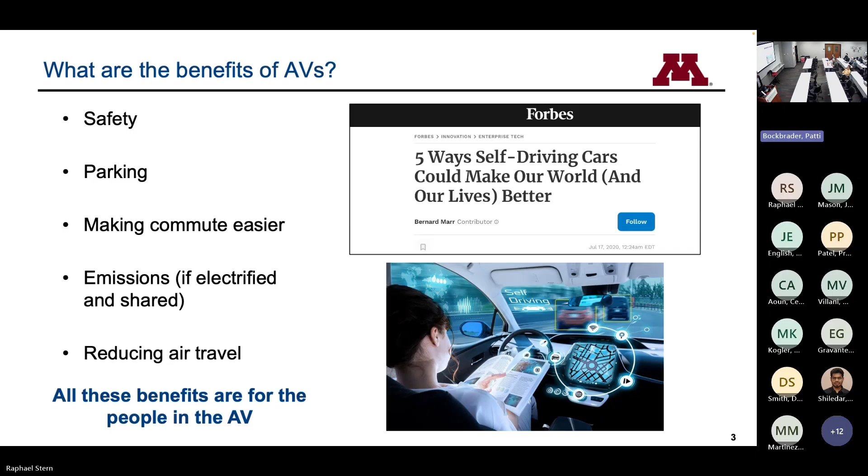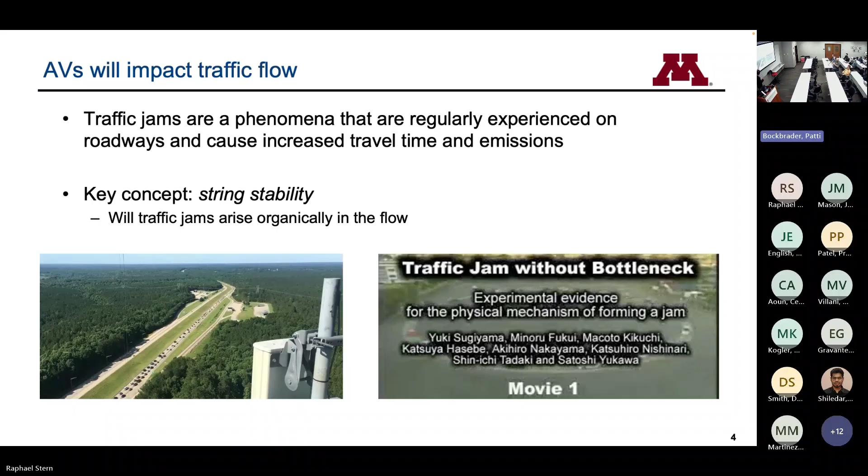One of the things I find absolutely fascinating is traffic jams. I love traffic jams. Many of you hate being in them, but I really think they're fascinating. Many of you may have seen this before, but it's worth highlighting. Over here on the left, we have a traffic jam in the wild, on a roadway. You see here, in just a couple seconds, vehicles up there start to slow down, and then it propagates backwards up the stream of traffic.

For a long time there was a debate in the traffic engineering community about what was happening here. Is this due to external bottlenecks? Maybe a curve in the road, maybe there's glare causing drivers to brake? It was actually physicists in Japan who said, well, let's do what physicists like to do—let's run an experiment and test this out.

So they created this scenario: pure car following, one vehicle driving behind the other. They got rid of all the messy externalities of the world—no police officer pulling people over, nothing on the outside of the road. They're really just looking at pure car following. They start in an initial uniform flow, all vehicles at the same speed, the same spacing, and relatively quickly a traffic jam emerges. We traffic engineers call these 'phantom' traffic jams, because they arise for no apparently good reason.

What's actually going on has to do with how individual vehicles interact with each other, resulting in what we call string unstable traffic. The theory behind this was largely developed in the 1960s, 70s, 80s, even 90s. The basic idea: imagine a string of vehicles, one following the other, all at an equilibrium flow—same speed, same spacing, no acceleration.

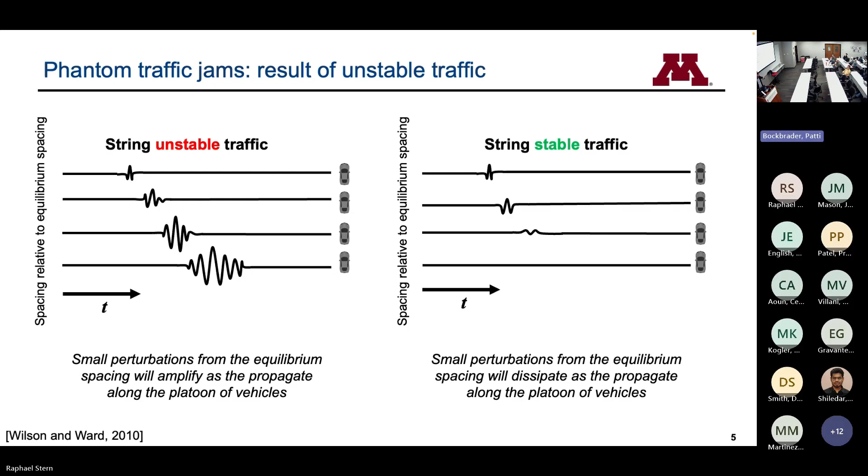One very popular approach is things like platooning, interconnected systems where vehicles use something like DSRC or other communication to communicate with each other, tell each other what they're doing. The cool thing is this has been around for quite a while, as you can tell from the vintage of those vehicles. This was done in the early 90s.

I was still a toddler when this video was filmed. This is a bunch of Buick LeSabres in the early 1990s, driving at an incredibly tight inter-vehicle space headway.

You can basically have vehicles drive very safely at much closer headways, much smaller spacings, meaning that you can potentially increase the capacity of a single lane of traffic somewhere 2 to 3x. That's huge, right? If you took a 2-lane or a 3-lane highway in one direction, you reduce it down to a 1-lane road

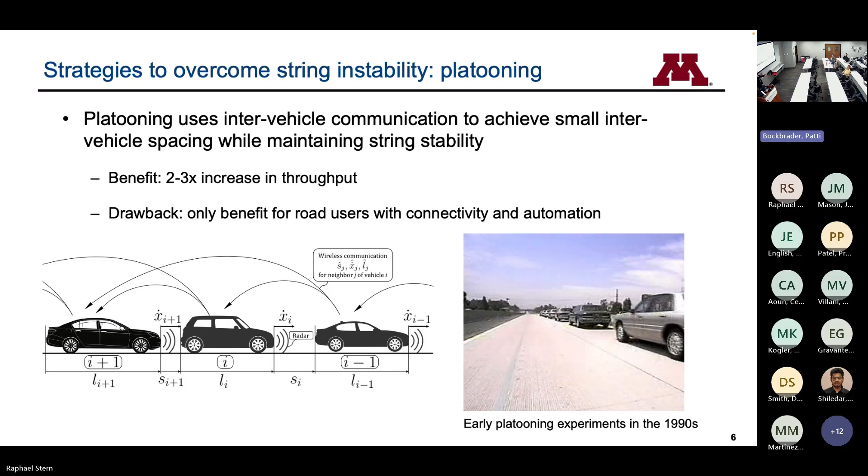without actually doing anything in terms of changing the infrastructure, or you take your 1-lane road, right, and you get the capacity of a 3-lane road, and all you've done is changed the way the vehicles drive. You're moving 3 times as many people on the same road.

The challenge with this, though, is that platooning requires everyone to opt in. You can't just do this if one or a small number of vehicles on the road want to do this. Everyone has to have the technology, everyone's technology has to work, and you all have to agree on some standard platooning protocol to make this work.

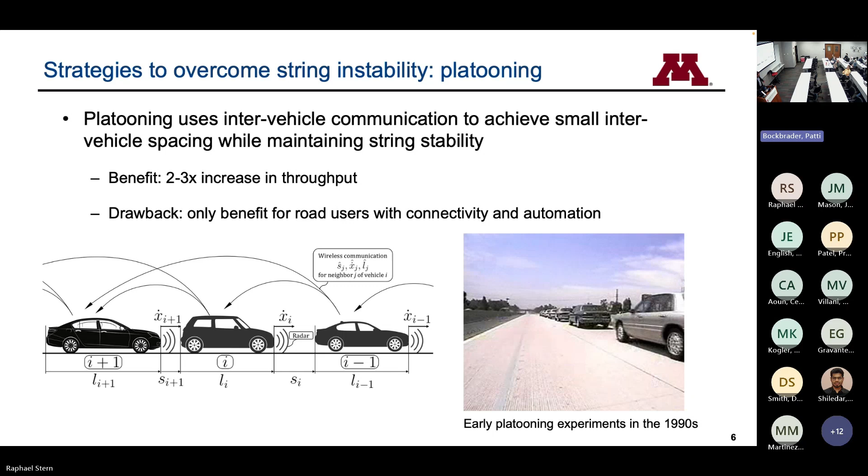Now, to be clear, we've long known there are many ways to increase the number of people we get on the same lane of highway. If you're a traffic engineer, instead of platooning, you can imagine carpooling. Just bring a friend along, and you've now doubled the capacity of that road.

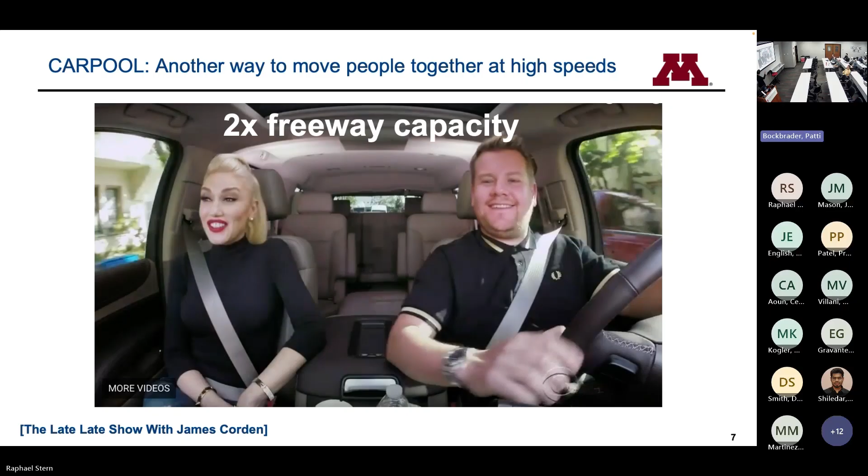If you're a fan of James Corden and his former show, you might know where this comes from. You pick up some more friends, now you have 4 times the capacity. So increasing capacity in terms of number of people per lane mile is not actually that difficult.

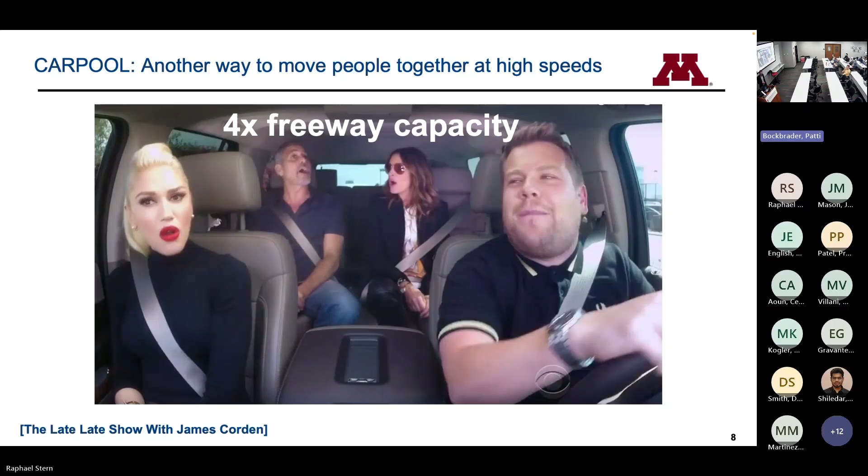We just don't seem to want to do it. If you're an urban planner, you might have seen this before. This was famously demonstrated by the city of Munster in Germany in the early 1990s, where they showed how many people can we get on one of our city blocks, depending on their mode of transportation. Obviously, if everyone drives cars, the road is...

Now, I hear a lot of, yeah, but congestion is not a problem, I'm not concerned about congestion, soon we're going to have autonomous vehicles. The problem with that statement is just by swapping them out for autonomous, I don't really see a difference, right? They still take up the same amount of road space.

So just swapping them out for autonomous, and we've already talked about all the implications that autonomy might have on your travel behavior, there simply isn't enough road space. If we're running out of road space now, just upgrading to autonomy isn't going to do it.

So that's what I want to focus on for the next couple of minutes: how are autonomous vehicles likely to drive? How is that going to impact the traffic flow and the corresponding capacity? And how can we improve that, or how can we deal with that as traffic engineers?

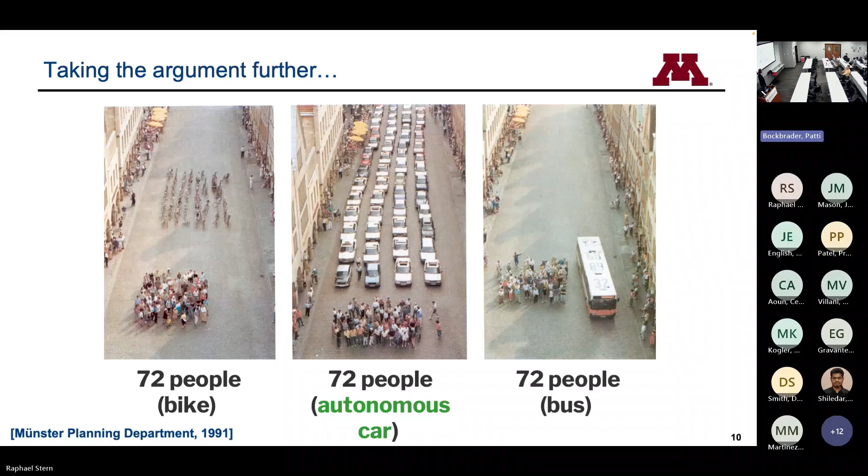Now, I think this crowd, I probably don't need to say this, but by saying autonomous cars, there's a whole bunch of different levels of autonomy, and different types of features, different driving capabilities come with different levels of autonomy.

So we range from no autonomy, level 0, that's what I personally still drive, to low levels of autonomy, level 1, level 2, driver assistance, where you're handing over some driving tasks to the vehicle at some stages, all the way up to high and full autonomy, where most or all driving tasks, most or all of the time, are done by the vehicle and not the human. So when we talk about autonomy, I want to make this distinction between low-level and high-level autonomy.

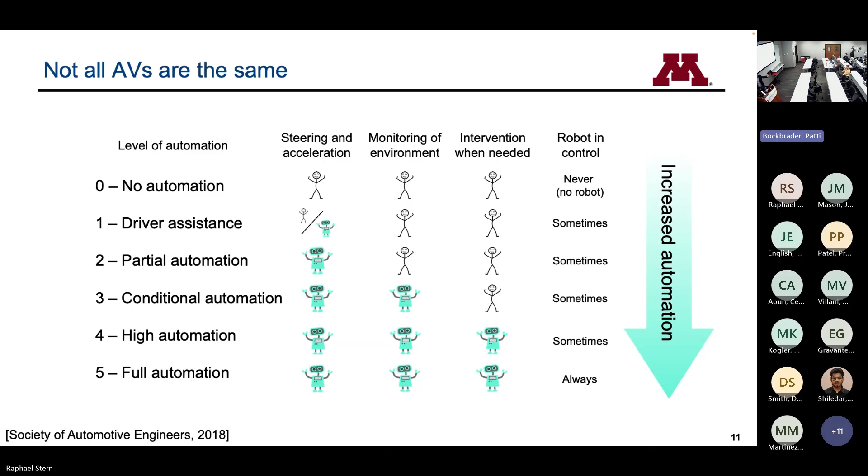Now we'll start with low-level, because that's what we already have. If we look at driver assistance features, level 1, level 2, things like adaptive cruise control, I'm at the point where when I rent a car from Enterprise or Hertz, most of the time it has this feature. Until recently, it was a premium feature on a luxury car, something a traffic engineer would pay extra for. But we're now at the point where that's simply not the case.

So my question is, how do low levels of autonomy, level 1, level 2, behave when it comes to string stability? Remember, string stability tells us whether we're going to see phantom jams arise for no good reason, or whether the system has more of a jam-smoothing property that gets rid of those jams.

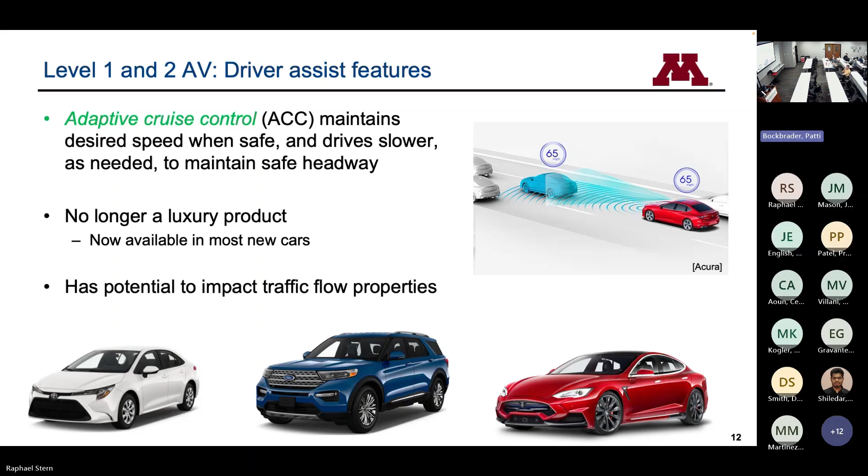Now, you can look to the literature, decades of research dating back to the early 90s, saying these things are actually relatively straightforward to design in a string stable fashion. Platoons of ACC vehicles may be unstable, but individual ACC vehicles likely can be designed quite easily to be string stable. You can see some sort of speed disturbance from subsequent vehicles that generally tend to dampen. So the literature says ACC vehicles are string stable.

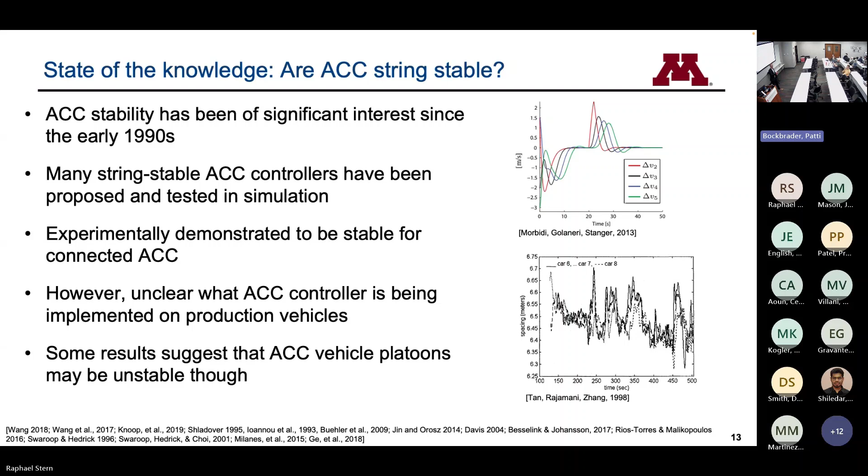The problem was, when I started this, it was inspired by renting a couple of vehicles and noticing that they weren't always behaving exactly how I'd expect if they were actually string stable. So the way I wanted to address this is by getting data for how they behave, building a model for their behavior, and then analyzing that model to understand what their behavior actually looks like.

The model I want to use here is a common traffic-level model. The reason is, you could invest a whole lot of effort into a very high-resolution vehicle dynamic model at the vehicle level, which is valuable depending on what you want to do. But if you want to look at traffic-level effects, entire corridor traffic-level effects, I actually want a slightly lower resolution model.

So I want to sweep all of the nonlinearity that happens with your engine, through your transmission, all the way down to tire pressure and road surface friction, into a relatively simple model that captures, at a particle level, the acceleration and braking of a particle.

The models that are pretty common here in traffic engineering are called car-following or microscopic models. They're ordinary differential equations that describe the acceleration of a vehicle as a function of the spacing available to it in front, the relative speed with the vehicle in front—is it catching up to or falling behind that vehicle—and the speed of the vehicle.

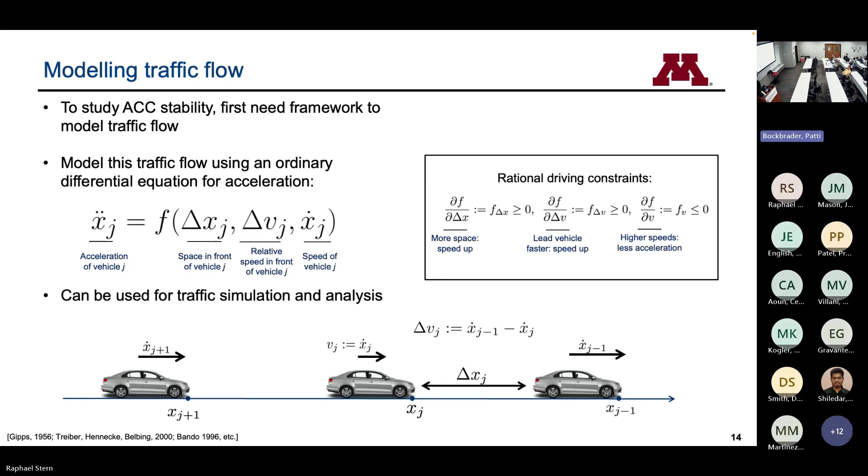All right, so it turns out that if you use these models and want to ask the question of string stability in car-following models, that's actually pretty straightforward. You can inject a perturbation and watch what those perturbation dynamics look like.

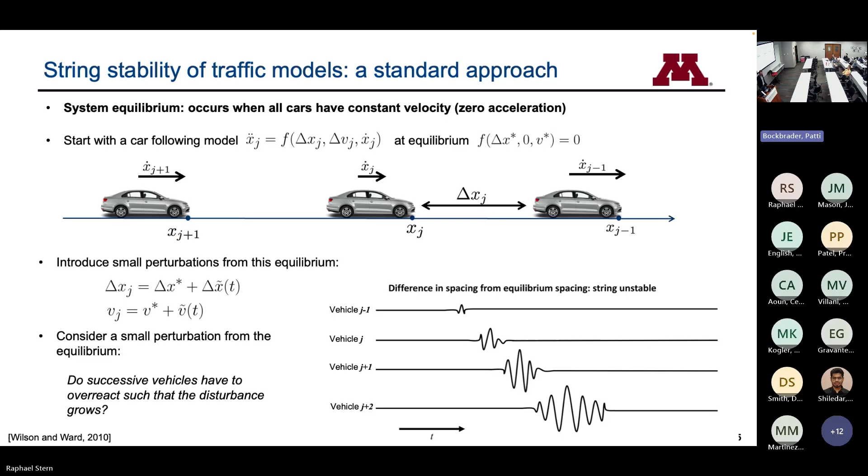And if you're willing to accept linearization—looking at the equilibrium and the neighborhood of that equilibrium, though we could debate for hours what's a fair neighborhood—if you look at linearization around equilibrium flow, remember equilibrium flow means same speed, same spacing, then you come up with a relatively nice characterization having to do with the Bode plot and which perturbation frequencies are amplified, to determine whether or not a car-following model is string stable.

It turns out it only depends on the partial derivatives of the car following model itself with respect to the state variable, and so you get this lambda 2 value. If that lambda 2 value is less than 0, we have a string stable model, meaning we're generally going to be dissipating or dampening waves.

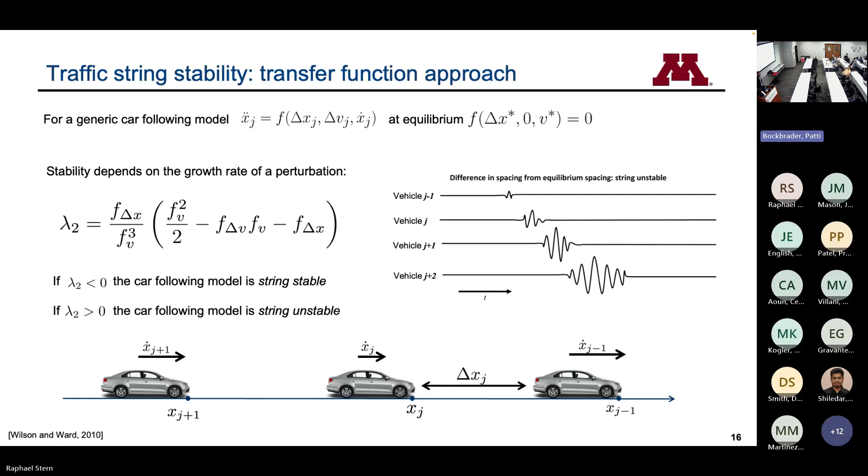And if lambda 2 is greater than 0, you're going to be amplifying perturbations or waves. What's really nice about this is all we have to do is come up with a calibrated car following model that closely matches the actual vehicle behavior at the vehicle level. Then, assuming we can take partial derivatives of that, we can analyze it and determine whether or not it's string stable. So the next step is to collect data and understand what's going on.

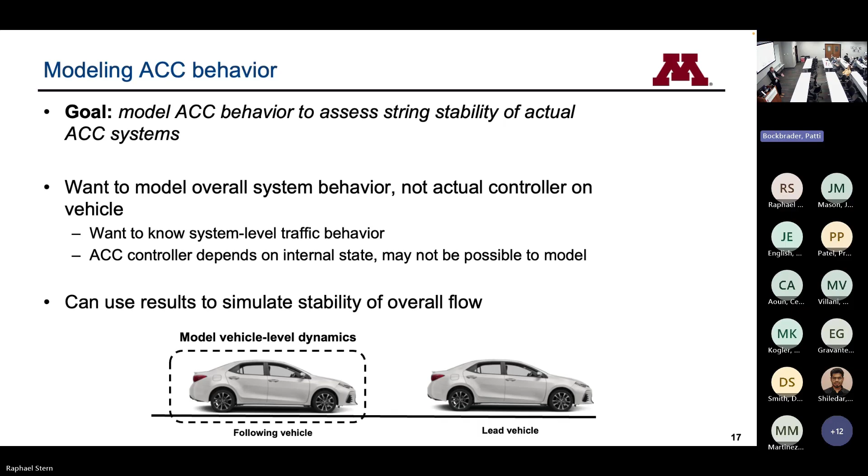The goal is to come up with a car following model that describes the following behavior of the vehicle. I'm sweeping a whole ton of nonlinearity under the rug here because I'm just looking at this as a particle, a vehicle that travels along the road, and I want to be able to match the acceleration.

The model I'm going to use is an optimal velocity type model coupled with a relative velocity component. Optimal velocity is somewhat of a misnomer — I prefer the word preferred velocity. Optimal velocity makes it sound like this is the optimal velocity to drive at based on some sort of optimization routine. That is not true. Really, these are constant time gap models.

So if you learned the 2 to 3 second rule in driver's ed, follow 2 to 3 seconds behind the vehicle in front of you — that's exactly what this is. The faster you're going, the larger you want that gap to be. And if you look at the literature, which dates back 20 or 30 years on string stability, that's exactly what they say to do.

So there's reason to believe the car manufacturers won't necessarily tell you exactly what they do. In fact, I've spoken with some and they say they don't really remember — from translating the original model, the original controller, down into the vehicle, there were so many modifications to make it work that they can't write down a closed form solution. But my guess is it's something pretty close to this.

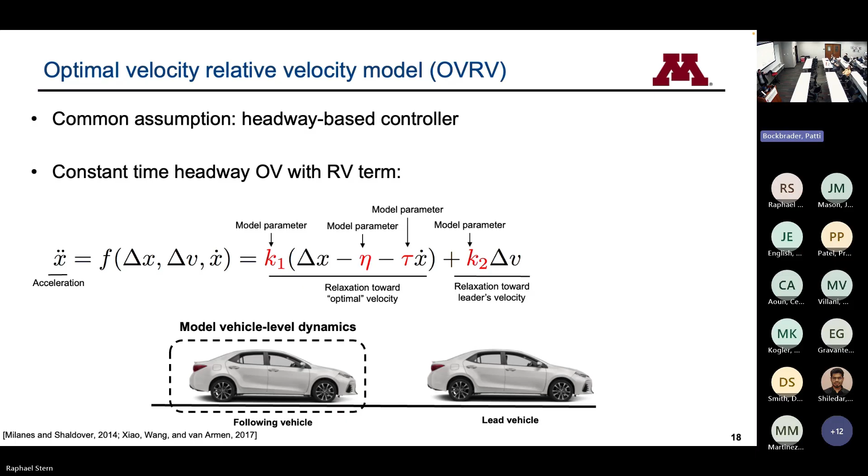So then you've got to go out and collect data. The way we do this is we get 2 vehicles. The lead vehicle drives with some predetermined speed, speeding up and slowing down. The following vehicle drives with adaptive cruise control on and just follows the vehicle in front of it. Both vehicles have high accuracy GPS receivers, so we get a good sense of the speed of each vehicle and the spacing between them, which we can use to get the relative speed.

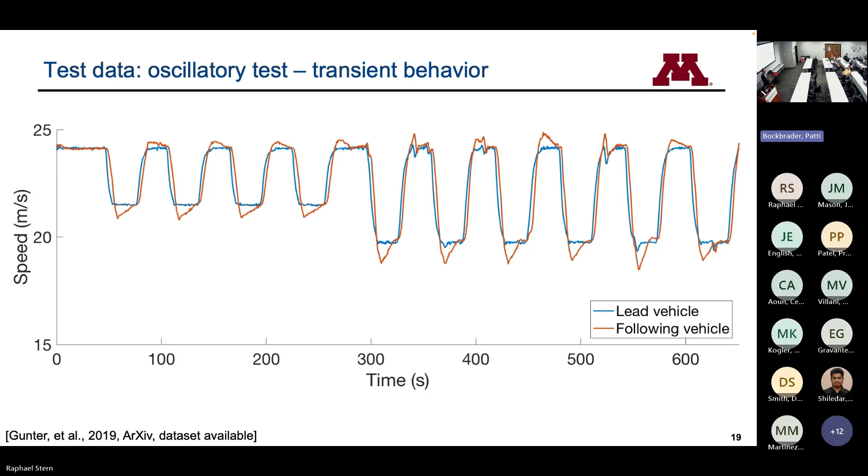Just to give you a sense of what some of this data looks like: we start driving, we slow down, we speed up, etc., and then we watch what the following vehicle does. Remember, this following vehicle is just driving with adaptive cruise control.

Another experiment involves some sharper braking events, and again the following vehicle shows a little bit of lag. These systems are working on relatively cheap sensors, generally radar-based in the vehicles we were testing, so there's a bit of a lag, which often means they have to brake a little bit harder.

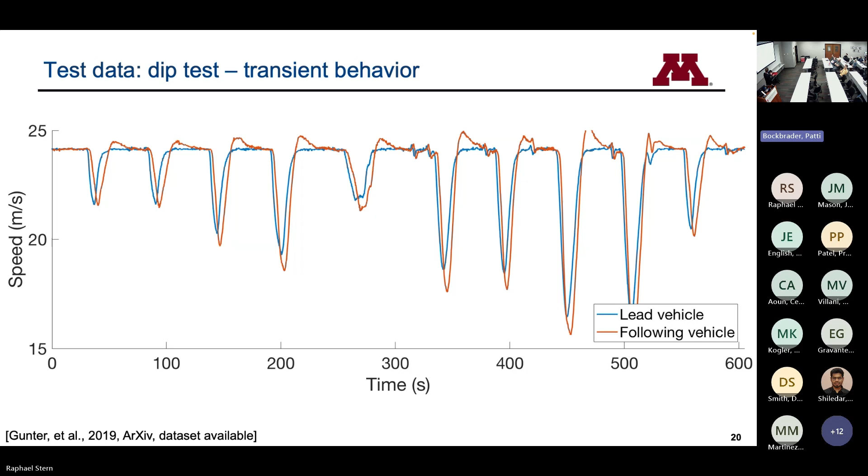And that's going to lead us to our conclusions about their string stability. Now, first of all, I think a reasonable question here is: we've taken an incredibly complex nonlinear vehicle dynamics and swept it into a really simple linear car following model. Is that a valid or reasonable solution?

So what does that tell me? That tells me that my modeling assumption that we're dealing with some sort of car-following model, where the controller is probably some sort of PID-like, proportional-like controller on a constant time gap, is probably not that terrible of an assumption. And this model is probably reasonable.

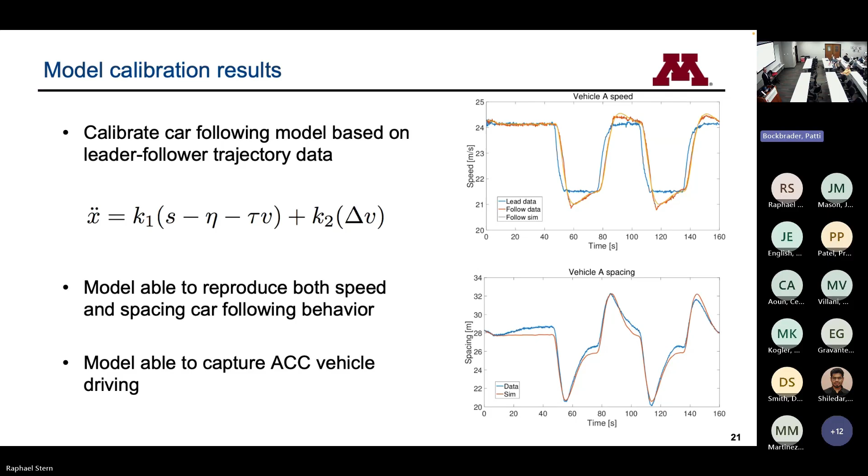So I did this not just on one vehicle, I did this on a whole bunch of vehicles. Initially 7 different vehicles, and I've done it on a couple others since. For each of these vehicles we can collect the data and use that to calibrate this model. Once we have this model, we can look at the partial derivatives. This is a linear model, so partial derivatives are really easy to take. We have the values for all the parameters, so we can easily compute whether or not this is string stable. The result is that all of the vehicles we saw are string unstable.

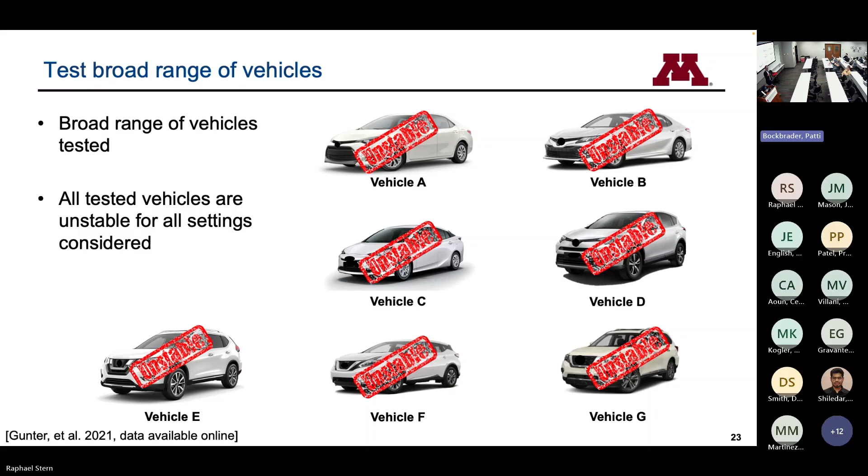Now there's an interesting second story here, and it really depends. You'll notice that all of the vehicles I originally tested are internal combustion engine vehicles, and there's a whole bunch of lag, delay, and nonlinearity that comes up. So it wouldn't surprise me if, even if you're looking at control theory from the 90s that says this is how you design string stable controllers, actuating the car like that is actually not that straightforward. Because all of a sudden you have not just a differential equation, but a delayed differential equation, which is much uglier to deal with.

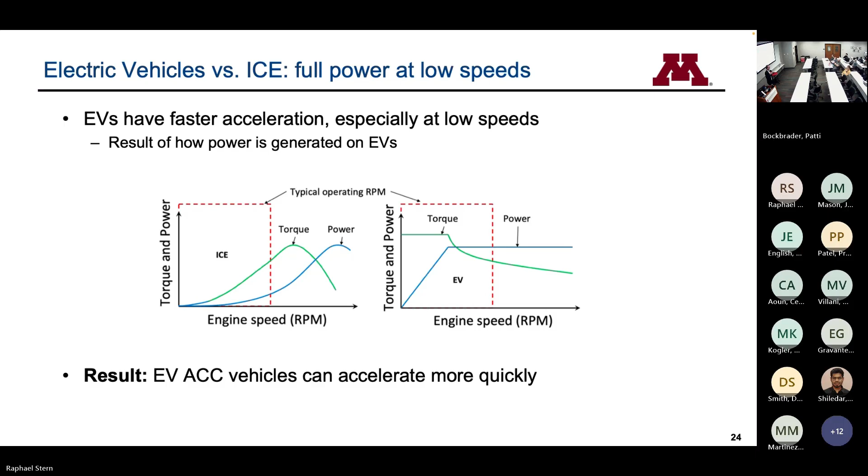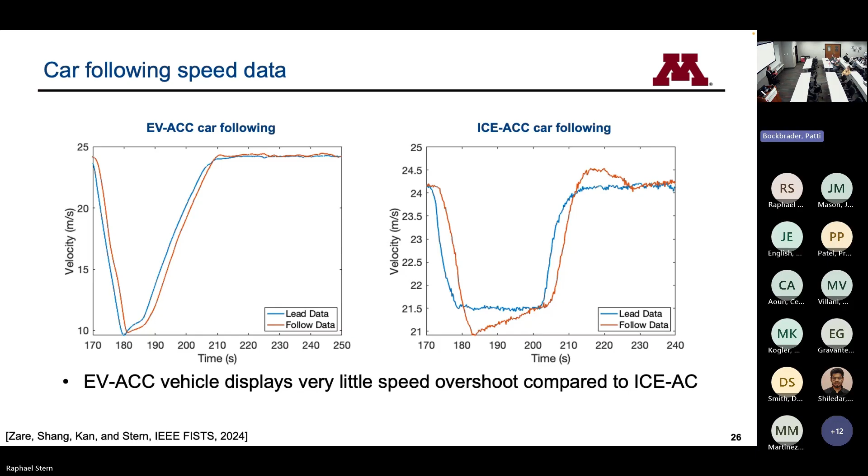Okay, we looked at this a little bit. It turns out when you stare at this for long enough, you start to notice how well the model fits the data. It turns out that simple symmetric model, which assumes the same braking and acceleration profile, works relatively well for internal combustion engines, even though braking is a mechanical process whereas acceleration is a much more complicated process. But for these electric vehicles, that model simply didn't work.

So when you look at the spacing versus acceleration space, in blue is the data. And that model I showed you, the constant time gap, proportional control type model, is symmetric—it assumes the same acceleration and braking behavior. But if you look at the data, that's not close to true. You can brake much faster than you can accelerate, even on an electric vehicle.

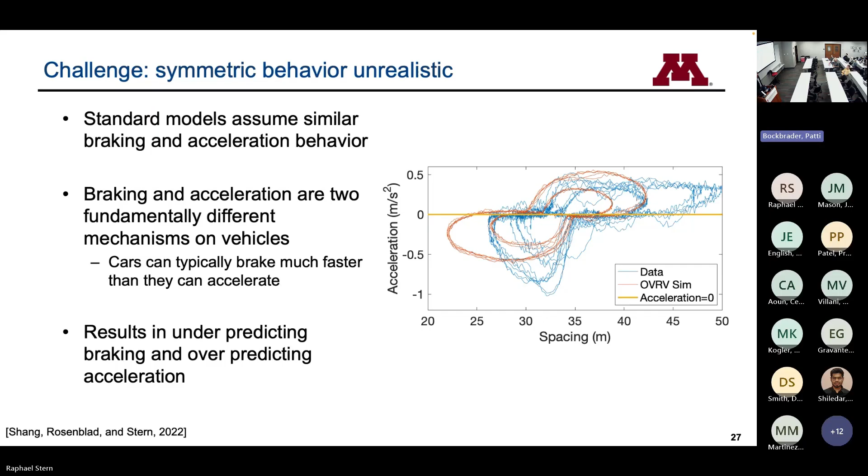So we spent quite a bit of time building more complicated models that capture this behavior better. That's really because when you want to do things like watch how these waves evolve, you need relatively good models of the individuals. So we introduced a couple different models. Here's one that worked particularly well. Yes, you're introducing more parameter values, but obviously it's going to be better, right?

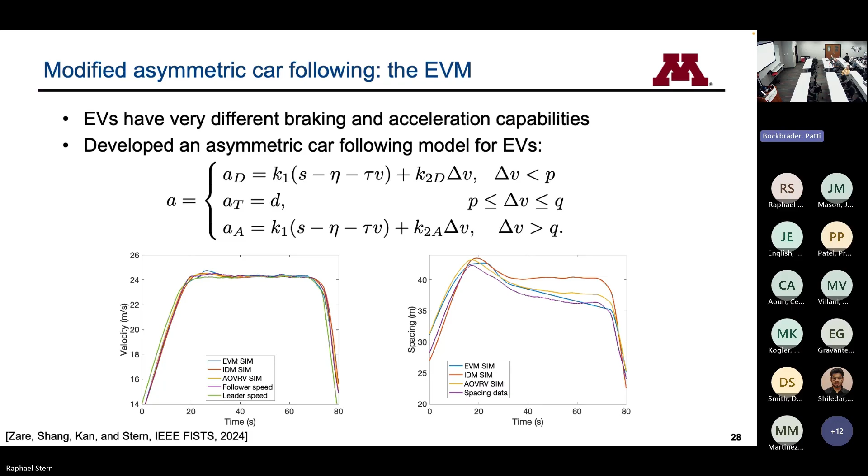You can break that down into an acceleration, braking, and coasting phase, and get a much better model. The punchline is, if you look at simulations of platoons of these EV ACC vehicles, you see much less overshoot, almost wave dampening on braking events, and much less overshoot on acceleration events.

This suggests that low-level automated electric vehicles are about as close to string stable as you might expect, which is kind of exciting. So we started with human drivers, string unstable, traffic jams emerging out of nowhere, like in a merge scenario.

We then said maybe there's hope in automation. Looking at the literature, low levels of automation ought to be string stable, which might ease some congestion. But when you look at the data, no — the AVs we have today are still string unstable. Though the ones we're starting to get, the EV ACC vehicles or EV AVs, might be promising.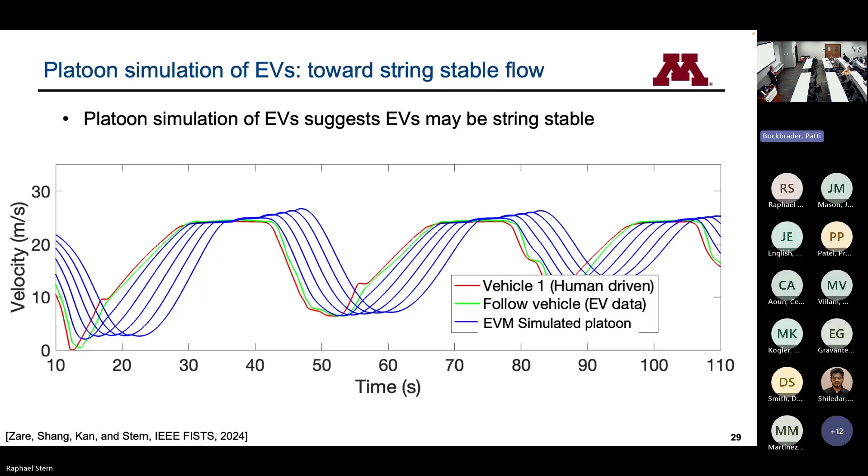If you're a traffic engineer, you've got intersections, merges, highways, and corridors that you need to manage. What does all of this mean for capacity? So we've looked at a bunch of different simulations with different levels of automation — commercial ACC vehicles, as well as a theoretical look to the literature on what people think autonomous vehicles ought to behave like in terms of reaction time. We can look at what the capacity is on something like a merge bottleneck in simulation.

Before we do that, I need to take a small detour. It's particularly cool to do this at OSU because this is all work done by an engineering professor here in the 1930s. Some of you may be familiar with this, but since we're a vehicle and automotive center here, I'm not certain — so if you've seen this, you can tune out for a few seconds, but I want to make sure we're all on the same page understanding these results.

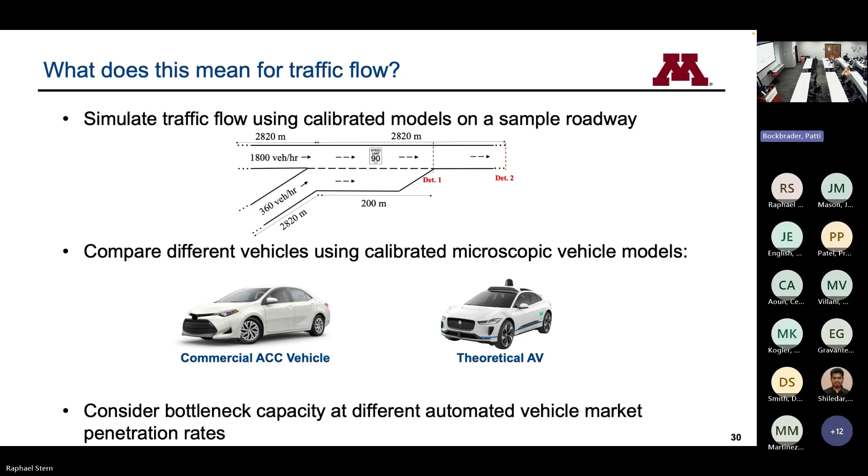On the left-hand side is Professor Bruce Greenshields, a professor here in the 1930s, who had the idea that traffic speed probably depends on traffic density. However, in the 1930s there simply weren't that many cars. So when he went out to collect data, he observed a lot of vehicles at very low densities — vehicles per mile of road — and correspondingly high speeds, and then one data point at a high density and low speed.

What he did is what any good engineer would do: fitted a linear regression to it and got a line. That gives us the Greenshields relationship — a linearly decreasing relationship between speed, from some maximum speed at no density (when there are no vehicles, traffic flows at the maximum speed, maybe the speed limit or a bit above), down to when all the vehicles are on the roadway and it becomes a parking lot, where traffic flows at no speed.

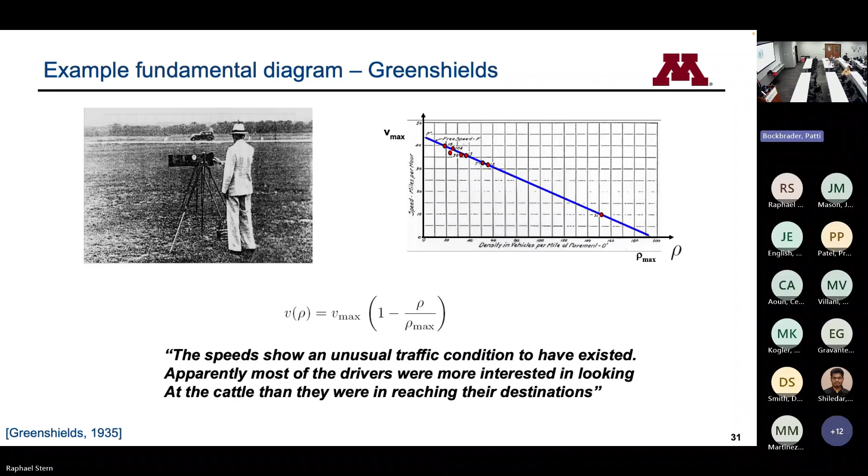If you know this, and you know fundamental properties of flow from fluid mechanics — that flow, vehicles per hour, equals average speed (miles per hour) times average density (vehicles per mile) — you can get a flow-density relationship. If you assume that constant linearly decreasing speed-density relationship, you come up with this parabolic flow-density relationship. There's a couple of important quantities here: we've got a critical density.

That's the density where we go from free flow to congestion. At that critical density, we see our maximum sustained hourly flow rate, or capacity. Those two numbers are crucial for highway management, because depending on what they are, that determines how many vehicles per hour you can get across your pavement, and at what density things start to become problematic.

Now, if you look at the data, it turns out Greenshields was close but not quite right. In reality, it's more like a triangular fundamental diagram. Vehicles in free flow generally don't really interact with each other, so they're all going at the same speed regardless of density, up until some critical density. In fact, if you look at actual data, which we'll look at in a minute, you'll see this is typically a lopsided triangle.

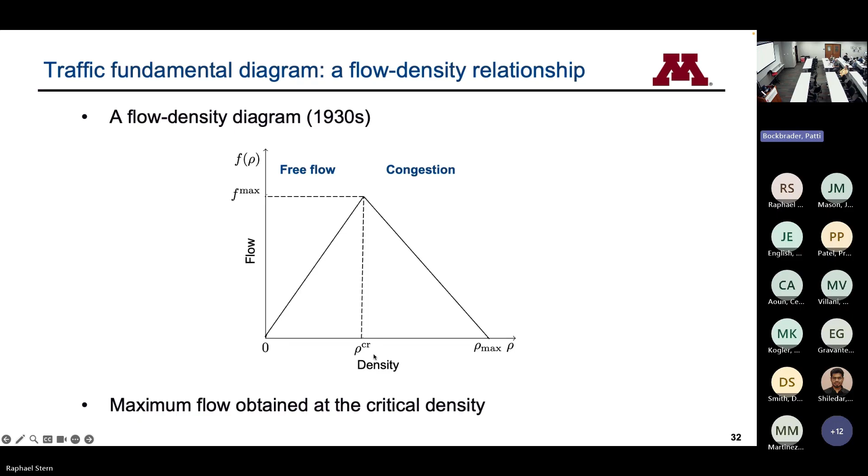So it's not an isosceles triangle like this, but it's some sort of lopsided triangle, where the critical density is typically a quarter or so of the maximum.

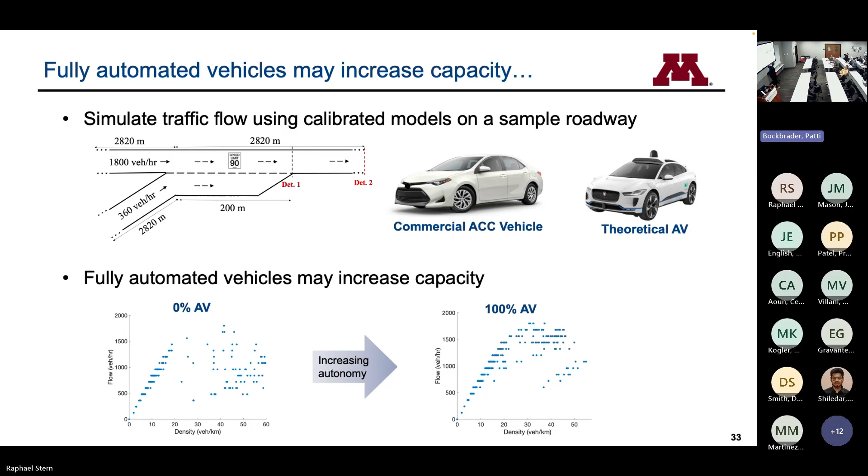All right, back to what we want to do now that we understand the fundamental diagram. If we look in simulation at fully automated vehicles, not considering connectivity—remember connectivity gave us like 2 to 3x—not considering connectivity, we see maybe a 20% increase in capacity.

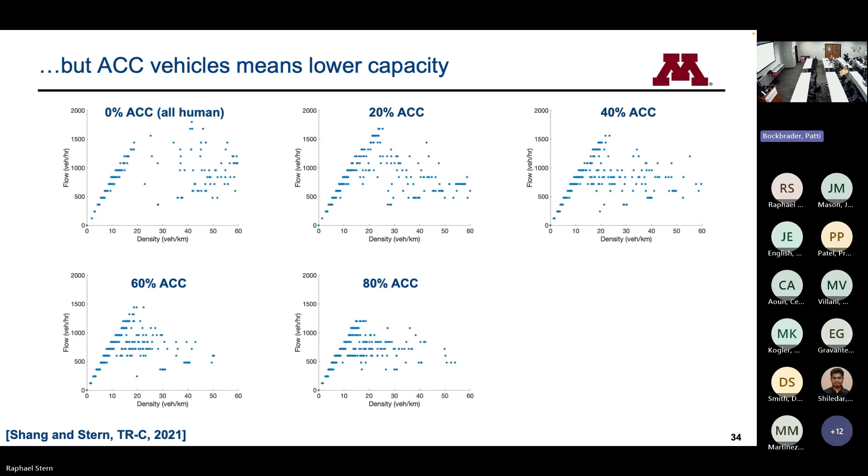But if we look at vehicle automation as we have it today, lower levels of automation, ACC, specifically ICE ACC, internal combustion engine ACC, at 20, 40, 60, 80, and 100% ACC vehicles, what we see is that the fundamental diagram collapses. Remember, the two important quantities here were our maximum sustained flow and the density at which the transition from free flow to congestion occurs.

What you see here is the more ACC vehicles we have, turns out they're much more conservative, much more lead-footed—they hit the brakes harder. They're safe, they're comfortable, and I don't blame car companies at all. But they are not designed or implemented in a way that is friendly to a traffic engineer with traffic flow considerations in mind. So you might see a 30% or so reduction in capacity. That means your 3-lane highway just became a 2-lane highway, and all that happened was a bunch of people turned on ACC. If you're a traffic engineer, that is potentially problematic.

All right, so at this point, the vehicles we have, likely the autonomous vehicles we have, will likely not actually bring us to that promised place of congestion-free traffic.

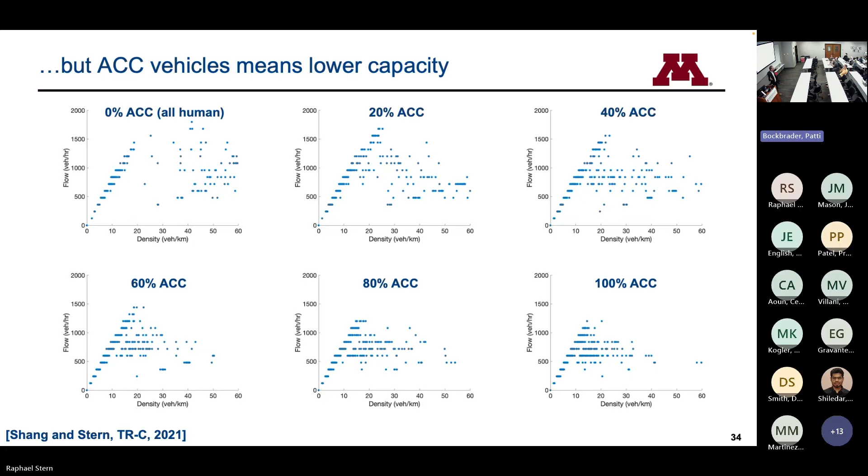However, I want to talk a little bit about what it might take to get there, and what it might take to actually drive the vehicles we have slightly differently—not necessarily with the objective of just looking at the occupant of the vehicle. Obviously we still want to make sure the car is comfortable and safe to drive in, but also add in the additional piece of information of what the overall traffic flow is like, and how we can improve conditions on the overall traffic flow.

And so to do this, I want to start with a model of a human driver. Honestly, it's a very similar model, just slightly more complicated. Instead of a constant time gap, it's a variable time gap that depends on distance. I want to start with a human driver model because ideally autonomous vehicles ought to drive similar to human drivers, or as similar as possible, but a little better.

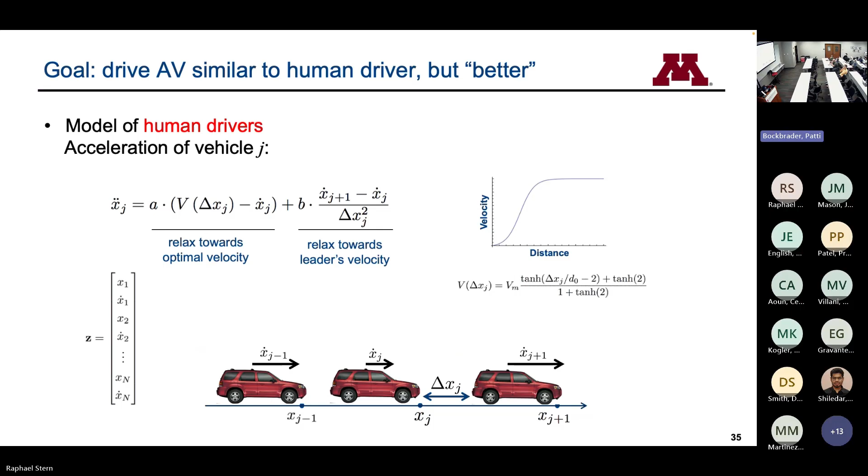And what's that 'a little better'? Well, the easiest thing you could think of is probably something like: you have some ideal speed you want to drive, you know what the local density is, so you have some optimal speed you want to drive based on that, and you do some sort of feedback control to push you towards that.

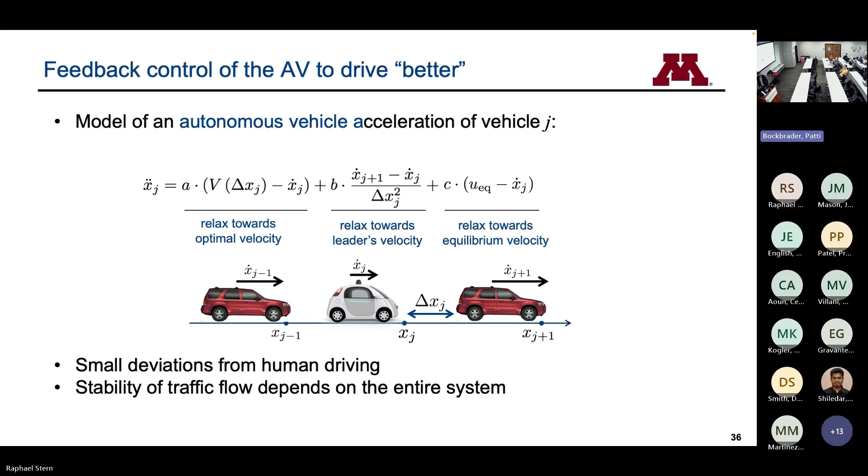Pretty straightforward—you can look at that same ring road setup. Your state is now the speed and spacing of all the vehicles on that ring road, and you can set up your linear system. If you do pole placement, if you increase your gain high enough, you can get all your poles on the left-hand side of the plane. The system is controllable—not a surprising result.

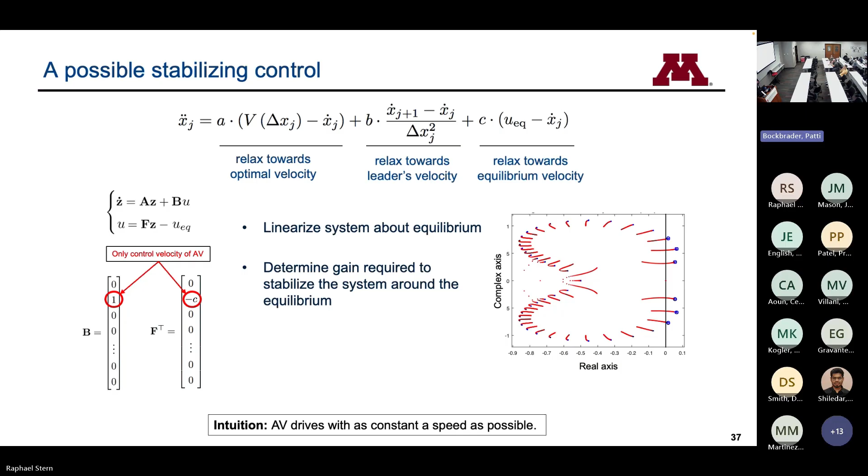But in theory, if you get the vehicle to drive with—what does that really mean? The intuition here is: increase your gain, which is basically just saying forget about speeding up or slowing down because of the vehicle in front of you, and just drive at a constant speed. If you pick that speed correctly—and again, we can have a long discussion about what it means to pick that speed correctly—you can already make a lot of progress.

All right, so unfortunately, that type of controller is very difficult to implement on a self-driving car. So we work to do something very similar. I'm not going to go into all the details here, because I think what's really important is the intuition: drive at a constant speed, at the right constant speed, unless local safety constraints tell you to do otherwise—unless you're going to get too close to the car in front of you.

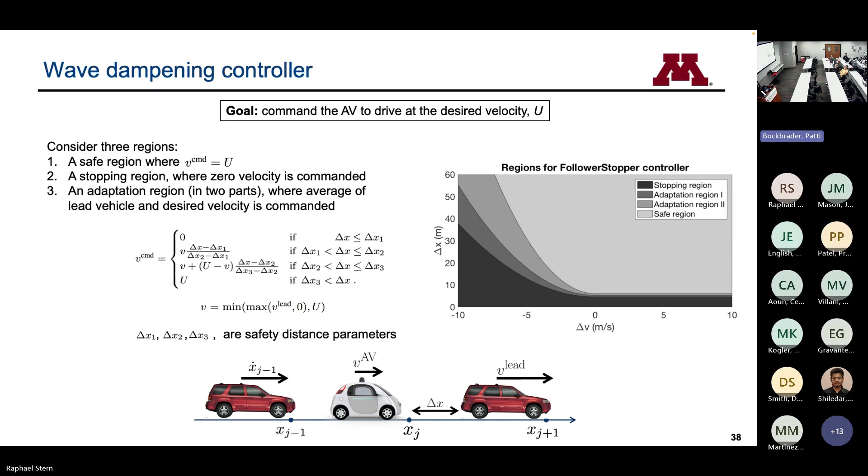We tested this as part of work I did a couple of years ago as part of a funded study with collaborators at the University of Arizona who had a self-driving car. I want to show you the video that resulted from this.

We're starting with that same ring road setup. The vehicle with the arrow on top is an autonomous capable vehicle. We have 21 cars on the road, all being human driven at this point, but we can hit a button to implement that controller on that vehicle. At the bottom, these are the speeds of the vehicles, and you can see relatively quickly that a stop and go wave started.

At this point we've turned on the autonomous controller, and what that vehicle is doing is exactly the intuition of that controller: drive at the right constant speed unless local conditions tell you otherwise. What's nice is it does open up a gap, but then uses that gap as a buffer when it hits the back of the wave, sending backwards a smoother signal for the vehicles behind it to follow.

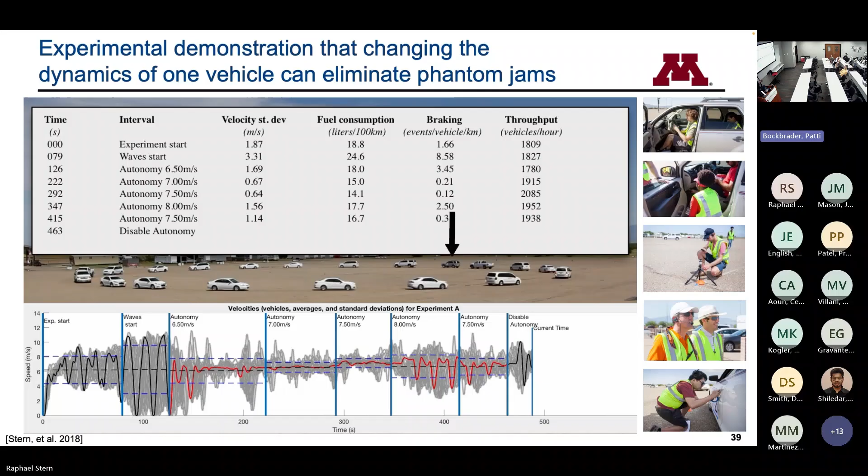By the time you get 20 cars up the line, sure, each driver adds a little oscillation, but it's not quite enough. So about 1 in 21, roughly 5% of traffic driving differently, is potentially enough to bully in a good way the other 19 or 20 drivers to drive better.

The cool thing is the other drivers had absolutely no idea there was an autonomous vehicle there. We hired people and said we're going to pay you to show up at this parking lot in Arizona at like 6 in the morning because it's July in Arizona, that's very early. We'll pay you for 2 hours to drive in a circle. They had no idea what was going on.

The only people in the know were those right in front of and right behind the AV, just in case something crazy happened. We wanted to make sure those were trusted drivers who knew what was going on.

You can look at the space-time diagram. Traffic engineers love to look at these. We have time on the horizontal axis, position along the road on the vertical. Each line is the trajectory of a vehicle. The more horizontal, the slower it's going; the more vertical, the faster. The red vehicle is our autonomous one. Comparing over here when we have traffic waves to over here when we're actively dampening those waves with just that single autonomous vehicle, you can see much smoother traffic.

We also had OBD2 scanners on each vehicle, giving us not super high fidelity measurements, but a relatively good sense of fuel consumption and onboard vehicle characteristics. We decreased total braking events, not surprising since we got rid of stop and go waves with fewer people braking. What was surprising to me was a nearly 40% reduction in fuel, not just for the AV, but across the board.

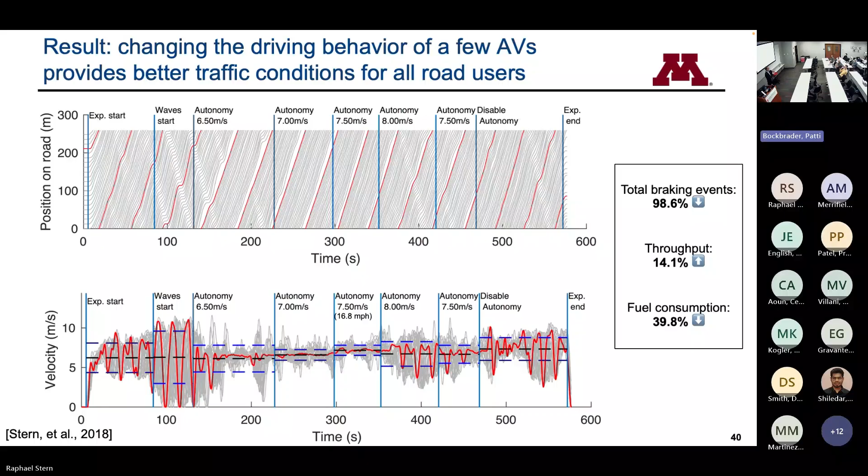Up until now, the way we've done traffic flow management, if you look at most traffic flow management textbooks, you assume a fundamental diagram based on the last 20 years of data. But it turns out that who's there determines what that fundamental diagram looks like. And if that's what you're building your control on, you want to make sure that you get that fundamental diagram.

So my vision for the future is to fight congestion with the AVs you have, not the AVs you want. In the short term, we might have worse or less effective AVs, or less efficient AVs from a throughput perspective. And that's okay. But what we need to know is who's there and how they're behaving, so that we can get a good estimate of what that fundamental diagram looks like and then update our control, or our control set points really, for that fundamental diagram.

I don't want to reinvent the wheel. We spent billions of dollars investing in our nation's traffic control infrastructure. If I tell you all of that is garbage, we need to completely tear it out and do something new, that would fall flat. That would never happen, right? Instead, I want to use data to make it a little smarter and a little more responsive to who's there.

So there's sort of a couple different parts here that are necessary. First, we need to identify who's driving on the road and figure out, is it an AV, is it an ACC vehicle, is it a human driver? Then we need to figure out what that mix of traffic behaves like when you look at the fundamental diagram. And then we can update our control.

What I'm going to be talking about here today is ramp metering control, perimeter control, where you're controlling the inflow into the ramp or into the highway. But in principle, you can apply this to any number of traffic control.

All right, very briefly, identifying who's there. This is something that I'm going to just very briefly talk about today, just because I want to get to something else. But the basic idea is we have cameras everywhere.

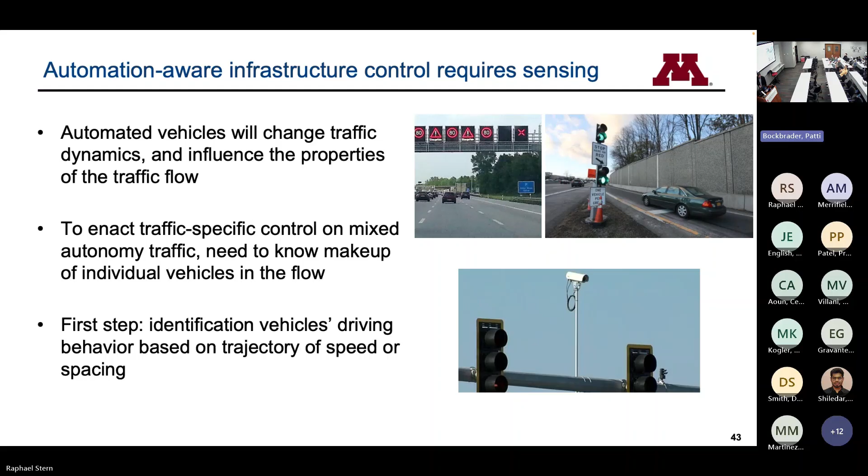And the way an AV drives, it accelerates. It's the same stimulus, same car braking in front of it. It behaves differently from a human driver. And so what we've done is we've done a couple of different, relatively naive neural network type approaches where you look at, you build an LSTM or something to predict, is that an AV, or is that driving like an ACC vehicle, or is that driving like a human driver? Turns out that is actually relatively straightforward.

Human drivers have much more variability in their behavior, and so you can even identify, is this a Toyota Camry or is this a Nissan Rogue? Because they have different ways of reacting to the same speed up and slow down.

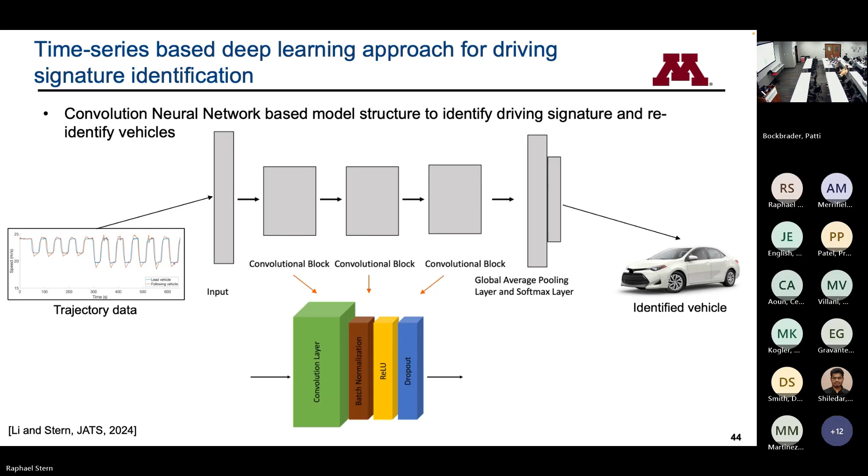All right, so let's pretend that we have this and it works perfectly. We know what each vehicle is. The next thing is we need to model those aggregate flow dynamics. The way we're going to do this is we're going to basically go back to the car following models and assume that we can calibrate relatively accurate car following models for each vehicle.

That's how we started the talk. And then kind of take those to the limit and look at them in the continuum to look at what that behavior is at the max.

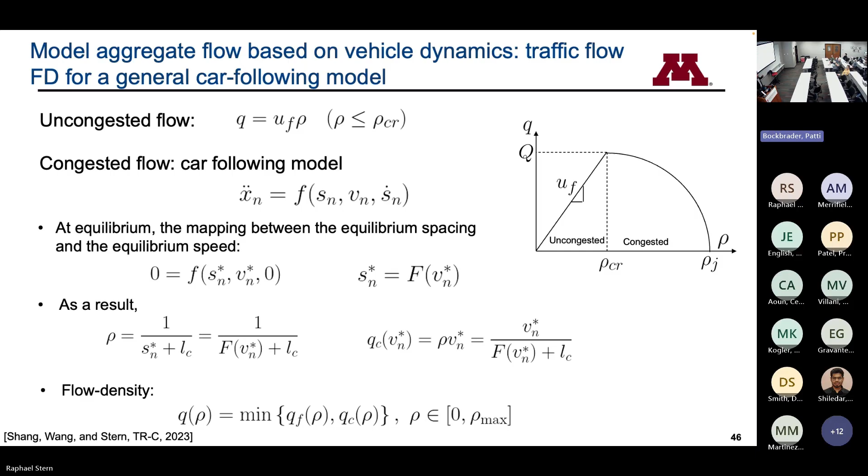All right, so at equilibrium, remember that equilibrium flow is we have no acceleration. We've got some sort of speed spacing relationship. And so what we can do is use that to come up with a density based on the speed, and then use that density, because the density is just 1 over the spacing, and then use that density and the property that we talked about before, where our flow is our average speed times our density, to come up with a flow density in congestion. In free flow, what we're going to assume is that all the vehicles just drive at the speed.

All right, and then we can do the same thing for the automated vehicles. And basically what we need to do is, the automated vehicles again are going to have our uncongested flow and our congested flow. And I'm skipping a couple of steps here, but basically, if we have that fundamental diagram for the automated vehicles, what we now need is a composite that's based on sort of the average, how many automated vehicles and human drivers do we have.

So we've got some parameter gamma, which tells us the percentage of vehicles that are automated, and we use that to compute a weighted average spacing, then a weighted average density. This gives us a density that's not just a function of speed, but also of the percentage of vehicles that are automated. That gives us a flow-density relationship, a fundamental diagram, where previously you only had density, but now we're looking at mean density and the percentage of vehicles that are automated.

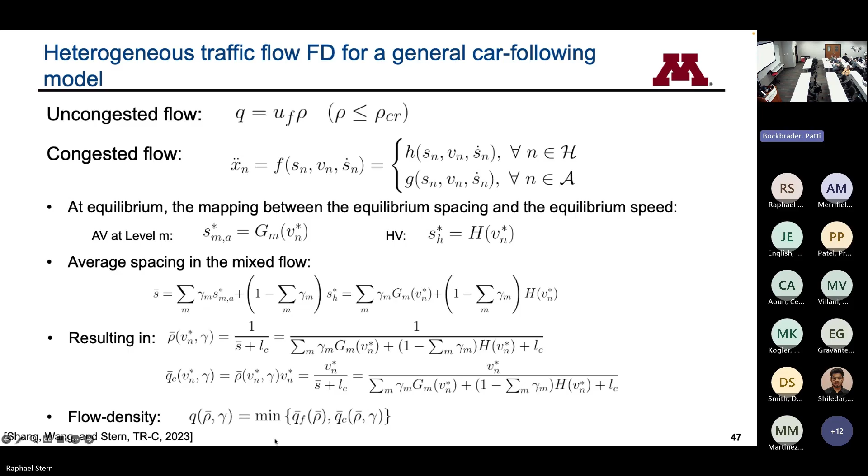So we get something that looks like this. If we assume human drivers follow an IDM, pretty common, and automated vehicles follow an OVRV, then in free flow everyone's driving together at the speed limit, but in congestion what matters is the percentage of vehicles that drive with the IDM versus the percentage that drive with the automated model.

So instead of the typical two-dimensional fundamental diagram, we've added a third dimension, the market penetration rate, the percentage of vehicles that are automated. At any particular market penetration rate, we can take a slice, and that's our current fundamental diagram, the simulation plots I showed.

In this case, I picked a pretty extreme example, a very aggressive or very conservative vehicle that greatly reduces the capacity, just to make a point. But in reality, depending on what species, or multiple species, of traffic you have, you could come up with different fundamental diagrams.

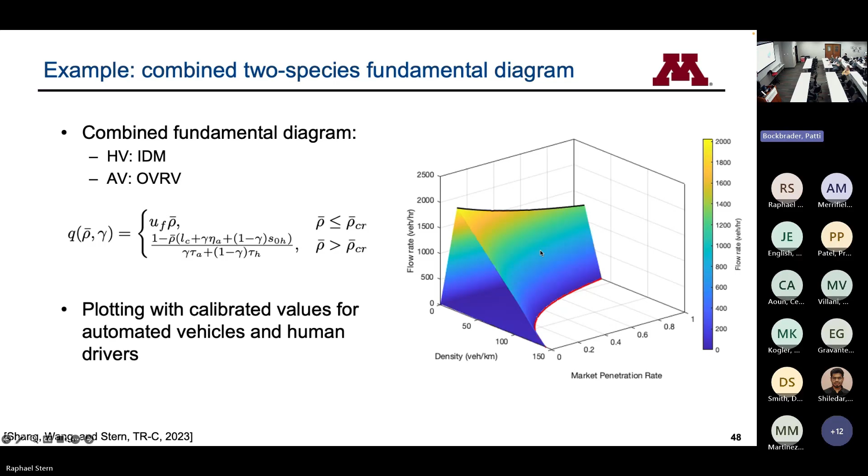So the last part is how do we use this to impact the control of traffic, specifically ramp metering control. The key to ramp metering control is really just that you don't want to get into congestion. The goal is to use the stoplight at the on-ramp to prevent the flow of traffic in, so that the flow on the main line, on the highway, doesn't exceed your critical density. That's the whole intuition, and there are a lot of different algorithms to do this.

The most popular one I've seen in the literature is called ALINEA, which is basically a linear feedback control. You look at the density on the main line, you look at your optimal density, you look at the difference, and that's how much you allow on from the ramp. It's pretty straightforward. Does it work?

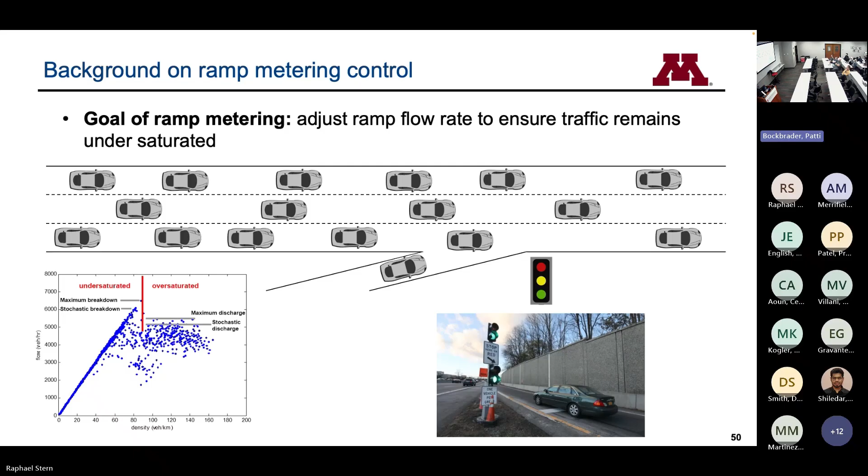Turns out it works really well. The Twin Cities of Minneapolis and St. Paul, where I live, are often cited as the poster child for this. We've had ramp metering since the '70s. People didn't like it, so in the early 2000s the state legislature mandated MnDOT, the Minnesota State Department of Transportation, to shut them off for a two-week period to observe what happens.

It turns out that when they had them controlled, they had about a 55% reduction in fuel consumption. And when they turned them off, travel time went up—I don't remember the exact number, but something on the order of 20 to 30%. So they do make a big difference.

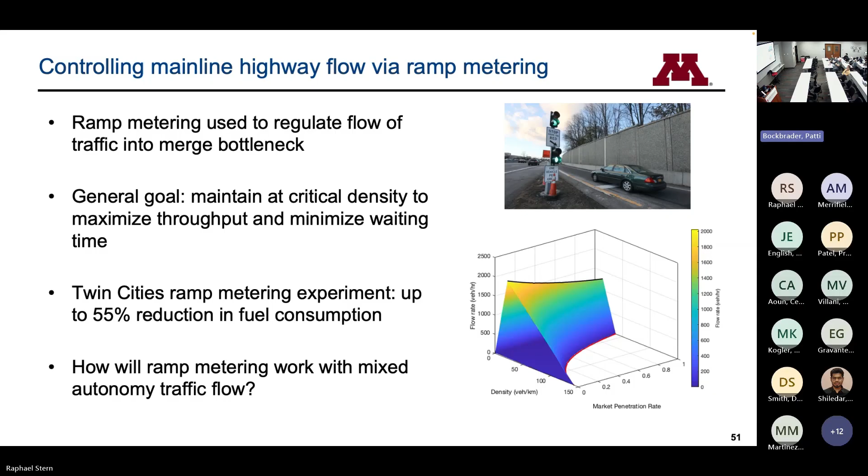They are very effective, and again, most of them are some form of feedback control. The most common one is linear, just a simple proportional feedback control. You've got your actual density, your critical density, and your target density versus current density—you look at how far off you are, and you update your ramp flow rate from there.

Now, in simulation, I want to consider three different scenarios. First, uncontrolled—no ramp meter, just uncontrolled dynamics. Second, controlled dynamics but assuming a fixed fundamental diagram—this is legacy control, what we're doing today. Third, controlled dynamics where we consider the current market penetration rate of vehicles, the current mix of vehicles at that moment in time. To do this, we need not just dynamics on the density, but also market penetration rate dynamics—what's the percentage of AVs at every point along the road.

In the interest of time, I'm going to skip to the simulation that shows these three different cases. A common metric here is total delay. If you look at the uncontrolled versus the controlled with the wrong controller versus the controlled with the correct updated dynamics that depend on who's there, you see a roughly 25% reduction.

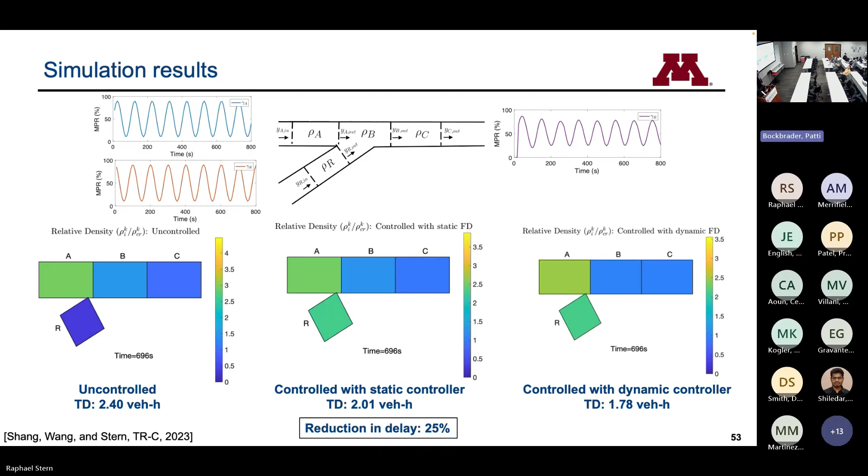So what that means is when we have vehicles that are worse, we could potentially see an improvement. In the other case, when we have vehicles that are better, that fundamental diagram for the automated case might be even bigger, and so we could be throttling ourselves. But if you update dynamically the fundamental diagram, you could actually increase the outflow and get more capacity across the road, because you have a fundamental diagram that's bigger, with a higher critical density and higher flow, so you match that.

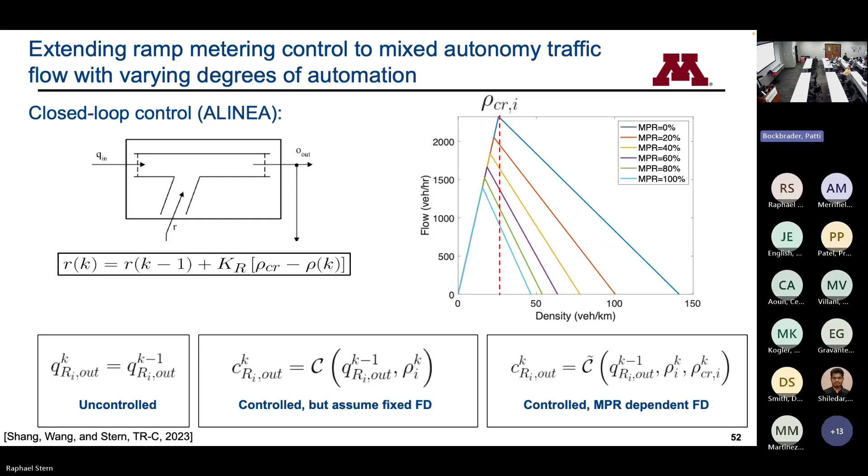So I think the theme so far has been individual vehicle dynamics change the flow, and we can do this for better. I'm going to briefly mention another direction I've spent a lot of time thinking about, which is that you can also potentially do this for worse. It's more of a cautionary tale, but if one vehicle drives differently, that totally changes the flow.

If 5% of vehicles drive differently, that totally changes the flow. That makes me nervous, because with vehicles getting over-the-air software updates, you can imagine a case where there's an over-the-air malicious software update that causes them to drive worse. Obvious cyber attacks, there are a lot of examples of these — a vehicle drives off the road, a vehicle crashes into another car. I'm concerned about these because they're bad, but they're also really obvious to detect.

I've come up with a whole bunch of different ways to do this. Most of the work basically focuses on taking the ODE vehicle model and injecting something into that ODE. Happy to talk about this more offline if you're interested. The results are kind of wild.

It turns out that you don't need to inject that much noise or that much of a malicious signal to have vehicles — not the vehicle that's attacked, but vehicles 10, 15, 20 vehicles down the line — cause a crash, and they don't even... you can't even tell who it was.

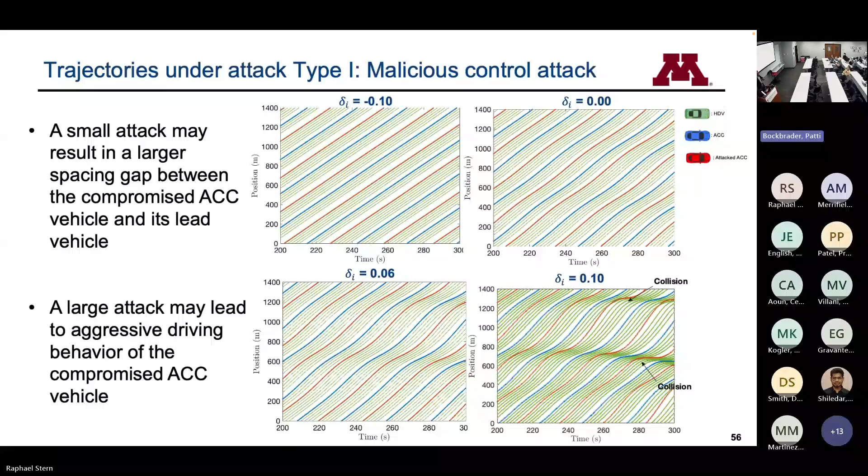But all of this so far has been benefits to the individual drivers. We ought to start thinking about benefits to the flow overall. That brings us to: what if we can leverage knowing who's in the flow, knowing what vehicles are in the flow, and use that to modify legacy control? It turns out even simple things, like updating the way we do ramp metering — a pretty standard tool for traffic engineers — has the potential to lead to pretty substantial reductions in travel time if we see this current generation of automated vehicles continue.

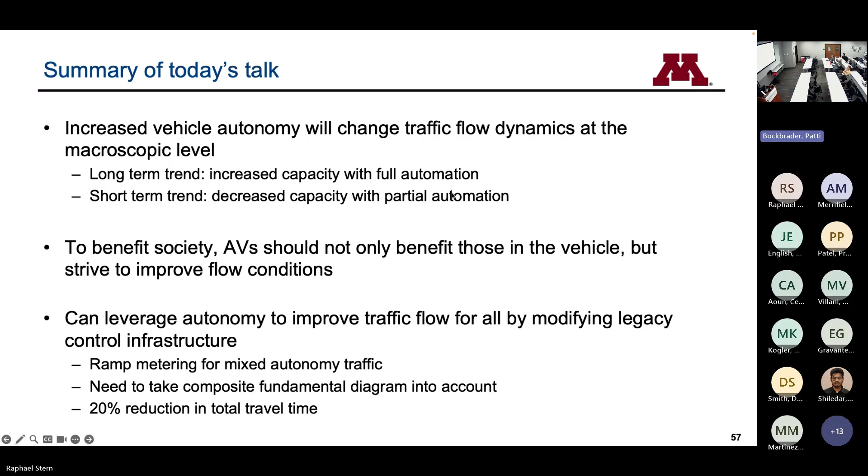All right, it would be unfair for me to say this was all my work — this is really my students' work. So, two former students and three current students who spent a lot of time on this, as well as a lot of undergraduate students and external collaborators. I think I might have gone a few minutes over, so I apologize for that, but I'm happy to entertain any questions if there's still time.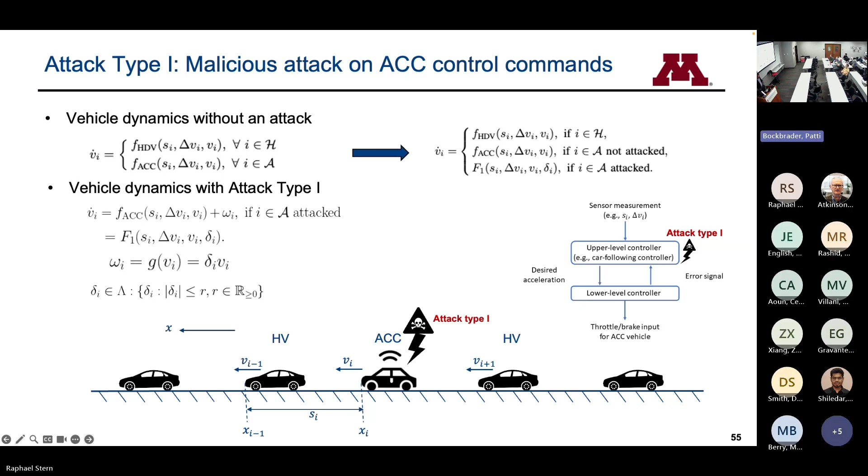The one is, the one is that we're on a 260 meter track instead of 230, and that's just because the vehicles were University of Arizona motor pool vehicles and are substantially larger than the vehicles in Japan.

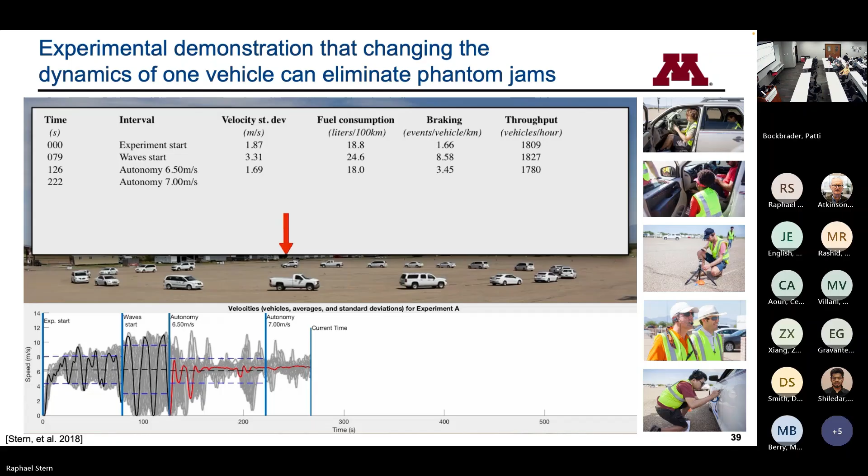The other thing is, I believe you'll notice that here we're going counterclockwise, and the video in Japan is going clockwise.

And that's because it turns out that if you want the human to follow a line of cones, you want the driver to be on the inside. In Japan, they drive on the left side of the road, so the driver is on the opposite side of the vehicle, and you need to change the direction of the experiment. Like humans, exactly. It turns out you can do what you want, but you still have to engineer the human.

So I have a question online: what are some of the pros and cons of AVs to manage traffic versus using more public transit? And what about automation in public transit, like automated buses? Would the fundamental diagram change for a public bus versus an automated bus?

The answer is I don't know. At the end of the day, when you look at the fundamental diagram, there's just not enough buses on the road to really impact it. We're looking at 2,000 vehicles per hour per lane as a pretty typical max of that fundamental diagram, and if you have bus service even every 5 minutes, you're not getting close to that.

On automation in buses versus cars, I still maintain that the most logical first use case for full automation is long distance trucking, because that's where you have very standardized conditions on the highway. Limited access, you don't typically have children playing at the side of the highway, only one direction of travel, no intersections, just on-ramps. Then perhaps a driver meets the truck when it gets close to the city and drives the last mile. That's where automation could really make it happen.

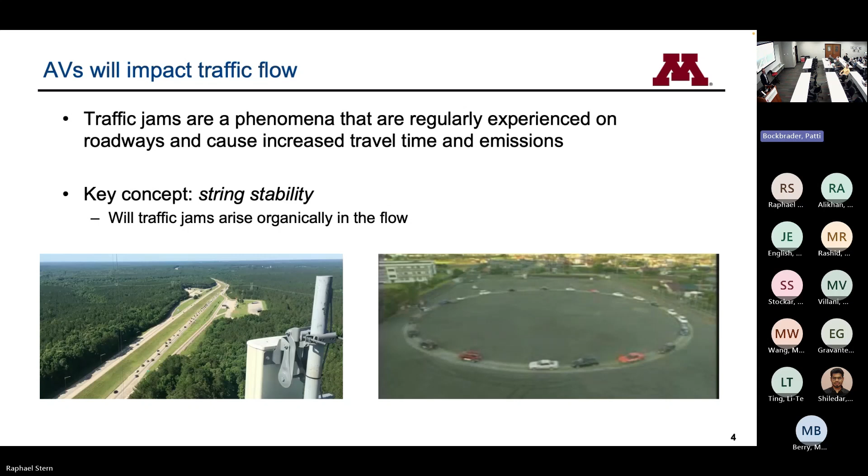So I think the focus ought to be on incentivizing those people who can move trips to transit to actually do so, because if you think about what will happen to vehicle miles traveled—this is the part I'm really concerned about—I can engineer 20% more efficient roads with better driving vehicles, but if people drive twice as much, there's no automation engineering that can overcome that. We'd have to build more roads, and that's also not a great solution. I think we need to work on that; I don't have the answer, but it's absolutely something that needs to happen.

This might be a little outside the scope, I'm not sure.

Anecdotally, I've noticed people also behave differently around ACC and autonomous vehicles. There's a lot more frustration maybe going around or cutting off, because they're not used to those safety buffers that other drivers might normally ignore.

Have you seen any of that in the longitudinal studies as well, or is that more anecdotal? If you had said not anecdotally, but in the data I've seen, I would ask, can I have that data? This is actually something we were talking about yesterday.

Anecdotally, there's a lot of reports, especially when Google was doing the testing starting in California, of people seeing what they could do, like seeing how much they could intimidate the car to do something, but also just really frustrated with the fact that the speed limit's posted at 30, but the car's going 20 because it doesn't feel comfortable driving at 30 there or something. A lot of frustration.